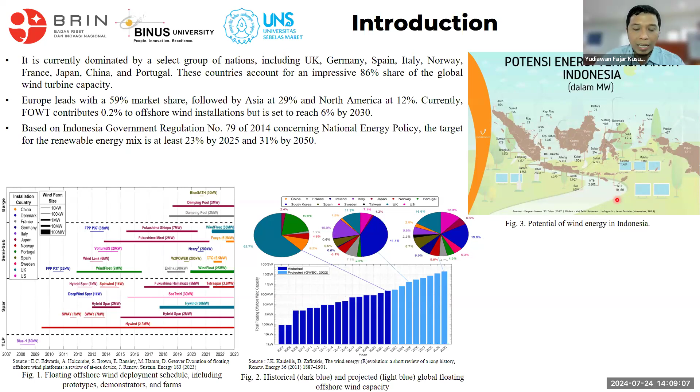In our methodology, we explain the basics of offshore wind turbine, wind potential, transportation, and installation.

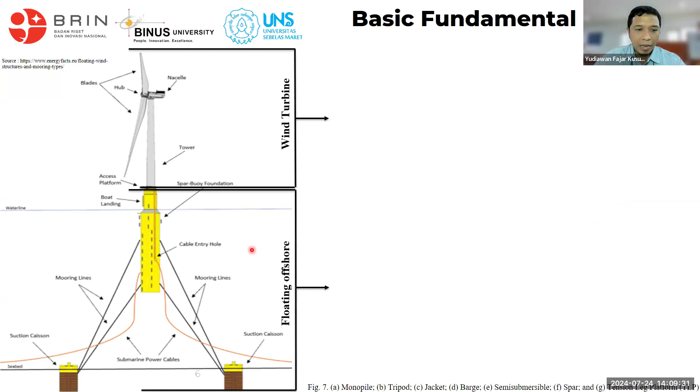If we build FOWT, we must focus on two main parts: the wind turbine and floating offshores. So let's discuss the wind turbine first. As we know, there are two types of wind turbines: first, horizontal axis wind turbine, and vertical axis wind turbine. Both types have their own advantages and disadvantages.

The power generation efficiency of horizontal axis wind turbine is greater than 70%, while vertical axis wind turbine has an efficiency around 50 until 60%. So the best choice for floating offshore wind turbine is horizontal axis wind turbine.

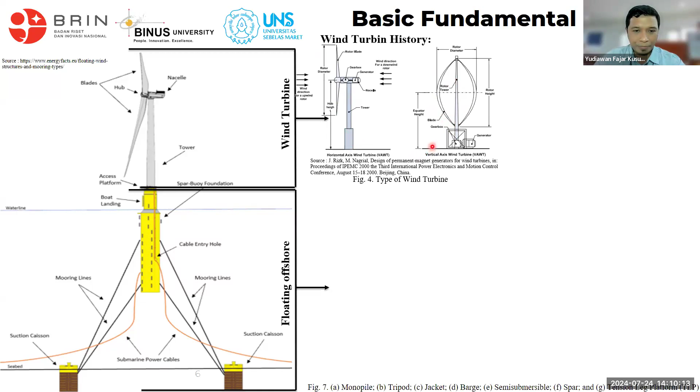After understanding the type of wind turbine, we then move to the type of floating offshores. According to Bosland Engineering and Consulting, up to 2022 the most commonly used type of floating offshore is the monopile, because it has a lower cost and quicker installation compared to other types.

Figure 7 shows that monopile, tripod, and jacket types can only be used close to the shore. But a barge, semi-submersible, spar, and tension leg platform can be used in water deeper than 30 meters.

To understand FOWT, it is essential to collaborate across multiple disciplines, as each component of FOWT requires different expertise. As shown in the image, there are 5 main disciplines involved in building FOWT, like aerodynamics, hydrodynamics, control system, structural dynamics, and mooring.

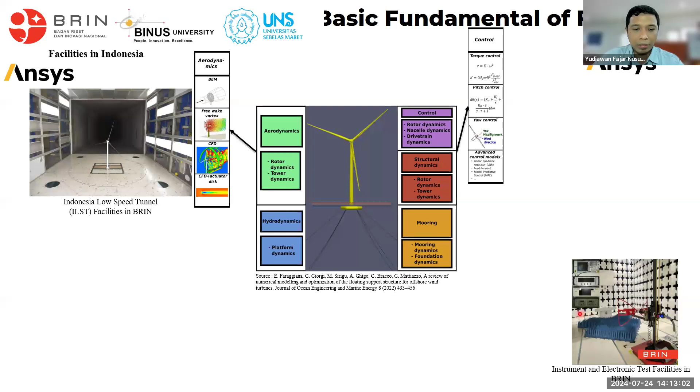After determining the wind turbine design, it is necessary to understand its control system. Same as aerodynamics, we usually use simulation and experiment for verification before we build the demonstrator. For simulation we use ANSYS Maxwell, and for the facility we usually use the instrument and electronic test facility in BRIN.

After that, we must know about the structural dynamics. It is crucial to assess the structural strength of the wind turbine. This involves a compression or load test joint system.

The structural design is verified through numerical simulation and experiment. In BRIN, we have this facility. Usually we use ANSYS also Abaqus for simulation, and for experiment we have the facility, load test facility.

After we focus on the upper water, we focus below the water. This discipline is hydrodynamics. The floater section requires expertise in hydrodynamics, including floater design. In BRIN, we have this facility for simulation using ANSYS or Maxsurf, and for the experiment we have seakeeping and maneuvering ocean basin.

Same with hydrodynamic for mooring, we use two facilities to verify the mooring for the floating offshore wind turbine.

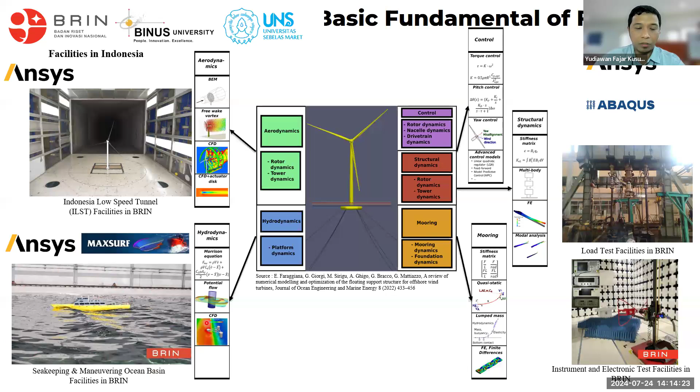After we know about the basic fundamentals of floating offshore wind turbines, we discuss the wind energy resource feasibility in Indonesia.

The national renewable energy until 2022 had only reached 40.11% of the target 23% in 2025. Hydroelectric power plants still dominate at 60%, contributing to the EBT mix level, while wind energy accounts for less than 2%.

In table 2, this is the wind power density in various locations indicating favorable wind conditions. If the average wind speed in Indonesia is around 5 meters per second, it falls into the intermediate category, with wind power density around 75 until 150 watts per square meter.

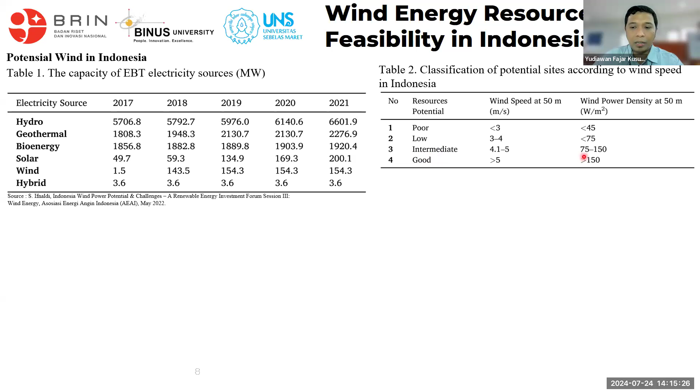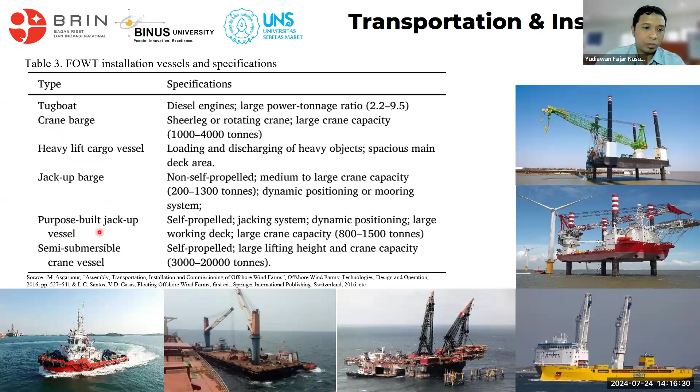After we discuss wind potential, we discuss transportation and installation. It is also important to understand the suitable transportation and installation method for Indonesian waters. According to various references, there are 6 common types of transportation used for transporting and installing FOWT, such as tugboat, crane barge, heavy lift cargo vessel, jack-up barge, purpose-built jack-up vessel, and semi-submersible crane vessel.

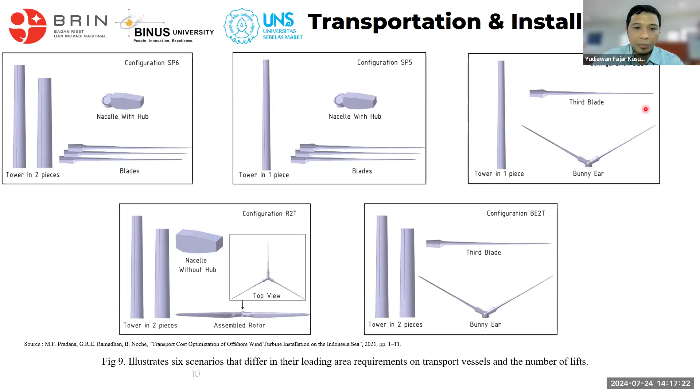Based on the reference explanation in the previous slide, we can determine the wind location, floating type, wind turbine specification, and suitable transportation and installation according to the condition of Indonesian waters. So first, we determine the wind location in Indonesia.

There are 10 locations with an average wind speed above 5 meters per second. The top three locations are South Sulawesi, Maluku, and East Nusa Tenggara, with potential capacity above 5,000 megawatts.

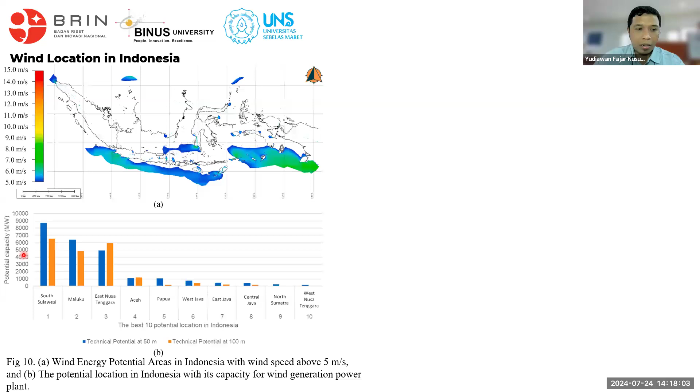After we know the wind location in Indonesia, we can determine the floating type for Indonesia. The average depth of offshore water in Indonesia ranges between 50 until 80 meters, making the suitable floating types tension leg platform, semi-submersible, and spar buoy.

After we know the floating offshore type, we can determine the wind turbine specification. Given that the average wind speed is above 5 meters per second, the appropriate wind turbine specification ranges from 0.75 megawatt until 7.5 megawatt. This specification aligns with the tested NREL, National Renewable Energy Laboratory in USA, where a 0.75 megawatt wind turbine has a cut-in wind speed of 3 meters per second.

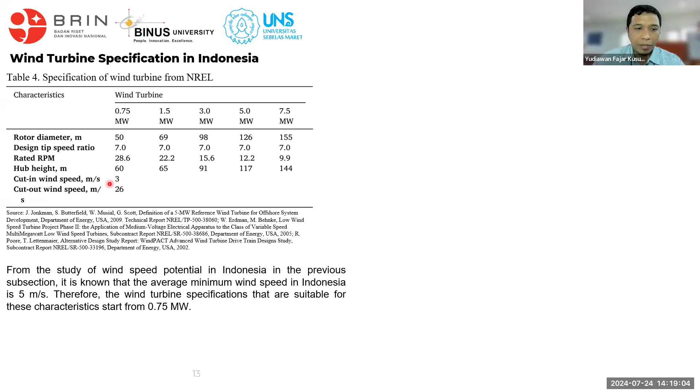This is reliable with the average wind speed in Indonesia. After that, we can determine the transportation and installation. Among the various types of transportation suitable for Indonesia is a jack-up barge or SPIV, because there is sufficiently large transportation capacity. For the installation of our FOWT, it is divided into several sections that will be assembled near the coast or port and then towed by the vessel.

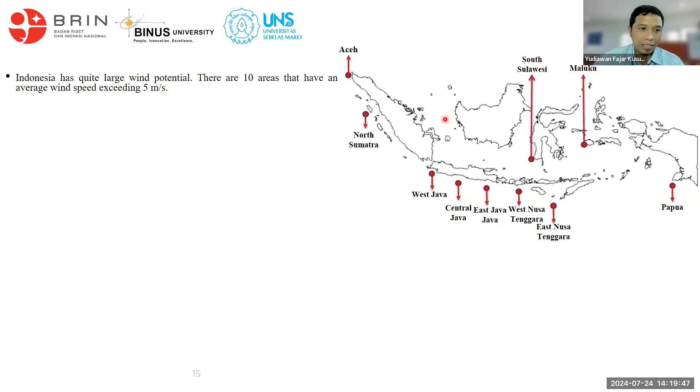So the conclusion of the study: Indonesia has quite large wind potential. There are 10 areas that have an average wind speed exceeding 5 meters per second. The average water depth in the selected area is around 50 meters, so the best choice floater types are spar, tension leg platform, and semi-submersible.

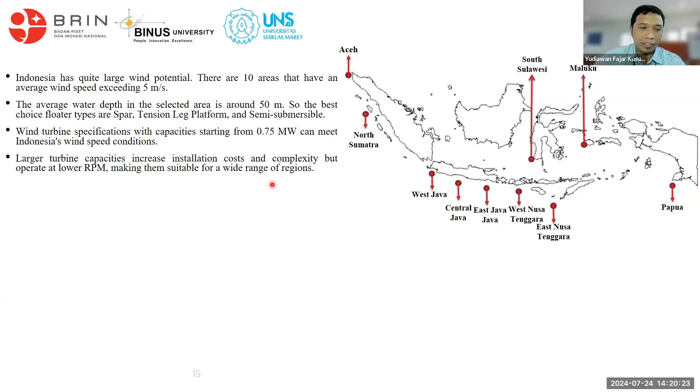Wind turbine specification with capacity starting from 0.75 megawatt can meet Indonesia's wind speed condition, because average wind speed condition in Indonesia is 5 meters per second. Large turbine capacity increases installation cost and complexity, but operates at lower RPM, making them suitable for a wide range of regions. There are two types of installation vessels suitable for Indonesian water, such as the jack-up barge and SPIV.

Future research, we hope, should focus on creating a demonstrator scale model to validate simulation results and laboratory scale testing, as well as building facilities such as suitable port locations and transport vessels to support the development of FOWT.

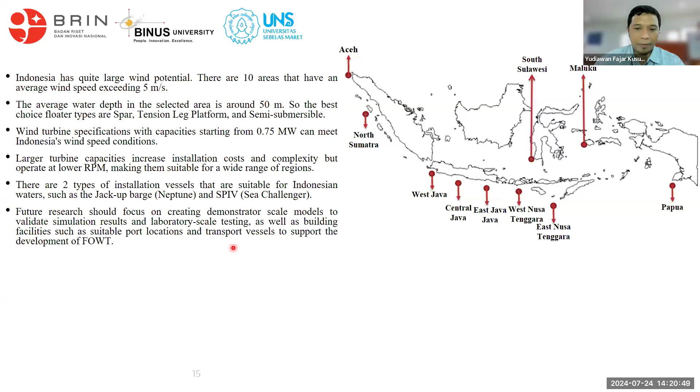Before I finish my presentation, I would like to highlight that our research results are still far from being ready for immediate implementation, because we are still conducting studies on the conditions in Indonesia, and of course there is limited funding.

Here are some photos of our activity from 2023 until now. This is the progress output in 2023. First, we create a design of a floater offshore wind turbine.

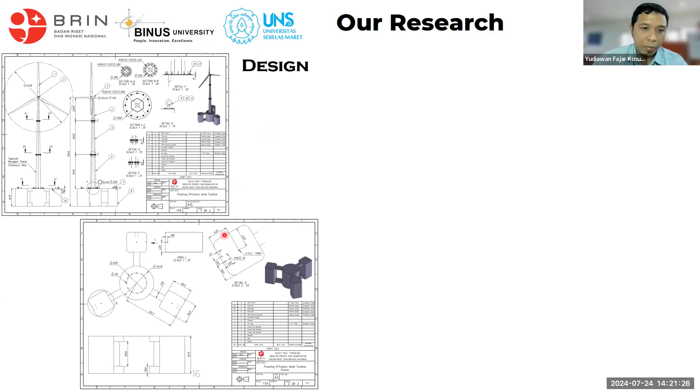After we create a design, we run numerical simulations using the ANSYS facility in BRIN. First, we want to know the flow in the rotor blade. After that, we want to know the structural dynamics in the floater offshore wind turbine, focusing on the blade and the connection between the blade and the hub.

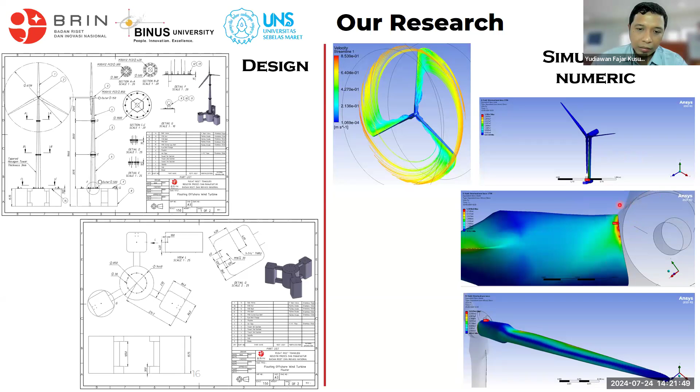After that, we make a model for testing in a wind tunnel. Usually this facility is in Indonesia. And this is the video footage of the wind tunnel testing.

We are at a speed of 10 meters per second. The rotor blade has not yet rotated. The rotor blade started rotating at a speed of approximately 10.6, I think. Yes, it starts rotating at 10.6. This testing has variation in speed up to 15 meters per second, and the scale model is 1 divided by 82 from the original scale.

Maybe I'll stop here because the duration is limited. I think this is the end of my presentation. Thank you for your attention. I return to the moderator.

Thank you very much, Mr. Yudiawan, for your wonderful presentation on your findings regarding the implementation of offshore wind turbine technology in Indonesia. I think the research paper indicates many insightful findings and a new perspective, especially by providing a comprehensive list of trends and challenges associated with floating offshore wind turbines, and connecting it with Indonesia's case and situation to find the best and most suitable options to address the challenges related to its implementation and development. Aside from the technical side, I believe the paper also provides valuable insights by identifying potential sites for wind energy generation, as well as insights to shape policies and strategies to accelerate the development of offshore wind turbines in Indonesia.

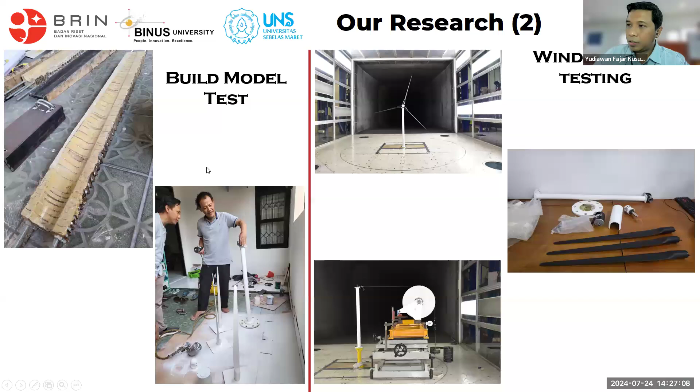In table 4, this is the specification of wind turbine from NREL. Because in Indonesia we don't have any standard for wind turbine, so I benchmark with NREL. 5 meter per second is very close because approximately wind turbine cut-in speed is 3 meter per second. This is a start, with capacity specification wind turbine 0.75 megawatt.

So this is a challenge for us. Maybe we can build the wind turbine until 10 megawatt. Maybe we start build wind turbine 1 kilowatt or 2 kilowatt. Maybe start with that, and maybe we can build like a wind farm.

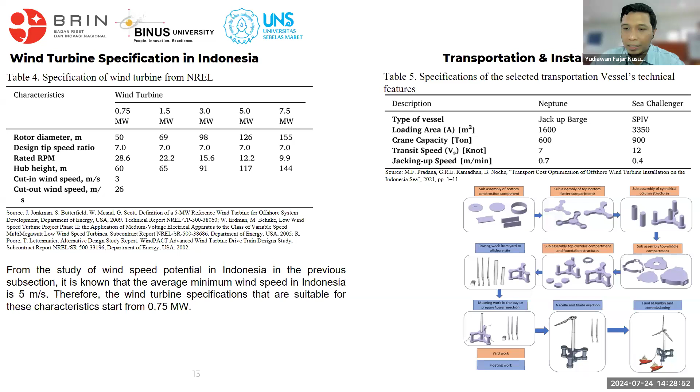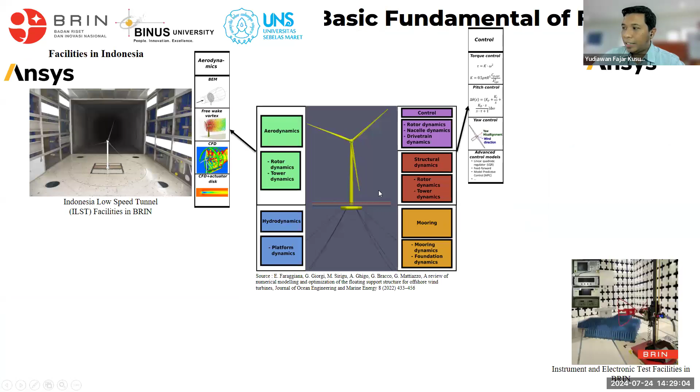And the second, how do you think the potential for wind turbine above 10 megawatt to increase? Yeah, I think it's feasible, but the cost to build this FOWT is very high because if we build 10 megawatt, the rotor diameter is very big and the height of the tower is very big also.

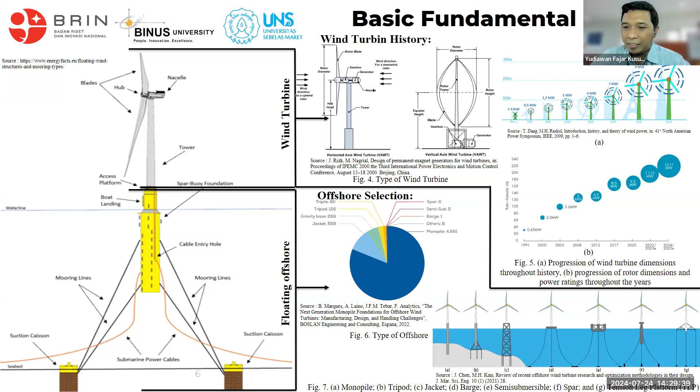So the cost is very high. But there are other solutions. Maybe we can build some wind farm with the capacity wind turbine 1 megawatt, but the amount of wind turbine is 10. So 1 megawatt times 10, this is equal with 10 megawatt. This is my idea, maybe my answer is like that.

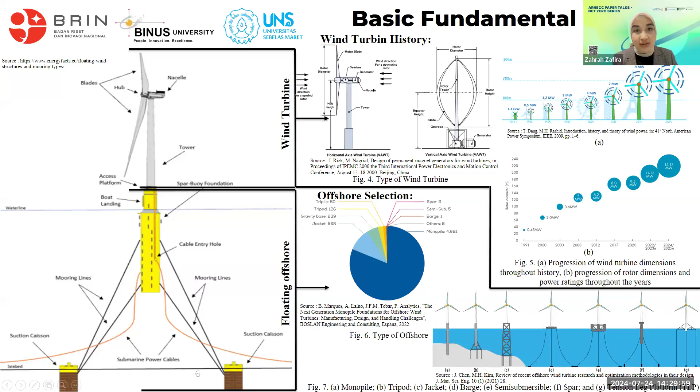I come back to Ms. Zahrah. Yes, thank you very much Mr. Yudiawan for your answer, and also thank you Ms. Jihan for the question. Maybe just to conclude the answer for the first question regarding the data.

For now, Mr. Yudiawan doesn't have complete data because of confidential issues, and Indonesia also still doesn't have any standard for the wind turbine. Hence, maybe the recommendation is that we can build the wind turbine at 1 kilowatt, but in a wind farm, building several wind generation units like that.

And then for the potential to increase the turbine to more than 10 megawatts, from the cost side, building the floating offshore wind turbine is also very high because the bigger the wind turbine, the bigger the cost will be. So previously Mr. Yudiawan also proposed the recommendation to build a wind farm using 1 kilowatt wind turbines, but building several wind generation units there in the wind farm itself.

Yes, moving on to the next question, which is from Sarpaneswaran. Thank you Pak Yudiawan for the comprehensive review of wind technology in the Indonesia perspective. My question is, the development and installation of wind turbines require significant capital investment, including the cost of turbines, infrastructure, and grid connection. However, the investment per megawatt offshore wind remains approximately 50% more costly than onshore wind. So what are the existing green funding mechanisms available in Indonesia to kick off such projects?